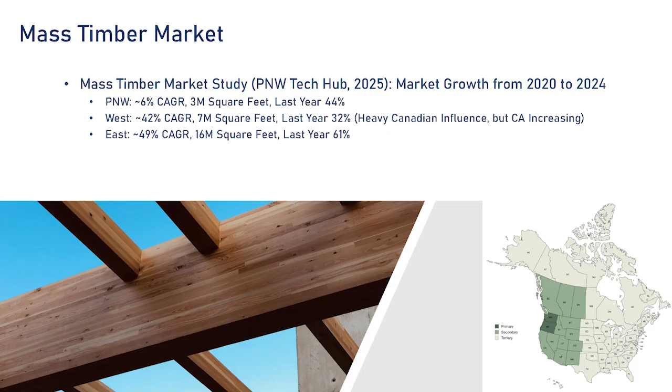So recently we were involved in a market study. We looked at market capacity and market supply. It just published a few weeks ago, but really focused on market growth over the last 5 years, and broke it down by how wood is often looked at as far as the Northwest, the West, and the East. I will say that I usually don't count Texas in the East, but they do. I think one of the key things that pops off the page is that stat of the compound annual growth rate in the East being 49% for mass timber. Last year it was 61%, but you look at the square footage of what's happening with that, and it's staggering. We really see that growth piece as part of our approach over the last decade, really looking at from forest all the way through to the frame, and how we scale and prepare ourselves for the kind of growth we anticipate in the East.

So a little bit about our story. Swinerton is a 137-year-old company, largely known as a general contractor and builder. But almost a decade ago, we completed our first mass timber building. It was a 156,000 square foot mass timber office building, then the largest in the United States. But we saw so much benefit in it. We got really excited about what the opportunities were with mass timber.

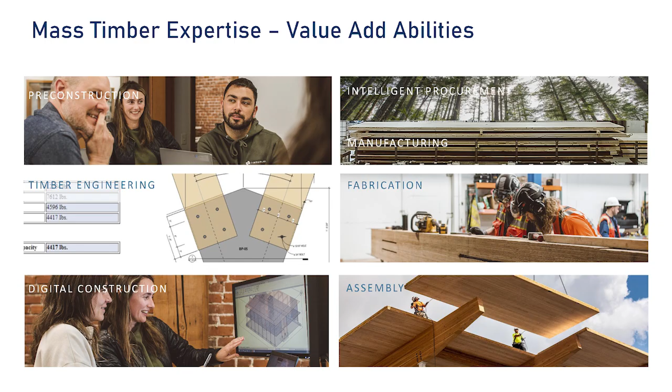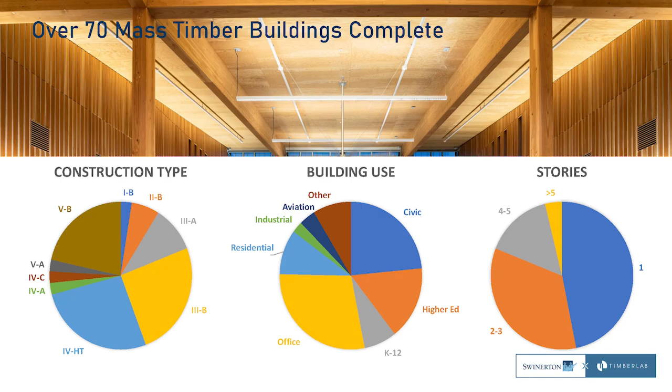I think those are amazing projects to execute on because, especially in early days, those are publicly available projects. So when you do a city hall or a community library or a higher education building or even a K-12 project, elementary schools, people are being exposed to wood. They're understanding what it is and how it changes the environment. 12 of our projects have been in education, and to me, it is phenomenal for how it changes things.

I remember talking to a nurse, and she was talking about doing a high school trip with her son to look at potential universities. They walked into a building we were involved in. She didn't know it, but she said, hey, it became the top priority for him to go to OSU Cascades in Bend because of the mass timber building and that experience of what it offered, both in program and the learning environment he would be exposed to. I was like, it's like it makes the buttons pop off your shirt for having been involved in something like that - just popping out your chest.

It was really exciting. I think the other thing that's interesting is not all buildings are tall buildings. Shorter structures are great opportunities - it doesn't have to be a high rise. High rise is an opportunity, but even the structures that are civic, we see those at lower heights.

I mentioned the markets we serve. We're a $6 billion contractor with 24 offices across the U.S., including here in Atlanta.

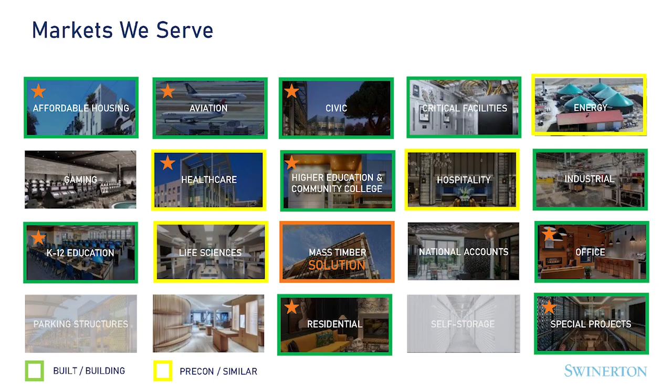It's really about how that expands into markets, and the greater the exposure we have, the more critical it is. I mentioned to Tim and Matt, if we can get like 5 mass timber buildings in a city, it creates the opportunity to take people through the spaces and experience different outcomes. It really starts to change the mindset that it's not bleeding edge, leading edge, but more mainstream as a solution in a building.

What's really cool too is that if you rewind back to the first original mass timber buildings in the U.S., office was really the market where it could thrive and be a good solution in that sector. To see today where mass timber is in virtually every single market type is cool—that resiliency, and the fact that it's a great solution no matter the market. It's maybe about finding the barriers and overcoming them and being the first.

So we're really excited about some of those emerging markets and seeing mass timber penetrate them. And then a little bit about vertical integration.

I think one amazing opportunity we have is such a robust domestic supply chain. Other folks have really hit on that today, but especially Georgia is really proud of its forests, and they are mighty good forests. Utilizing that regional supply chain creates a risk-averse solution—we've got tariffs going on right now. If we can source a lot of that superstructure from within a 200-mile radius, or even just the U.S., that's a huge value add to an owner. Who wouldn't want a risk-averse solution for their budget and schedule?

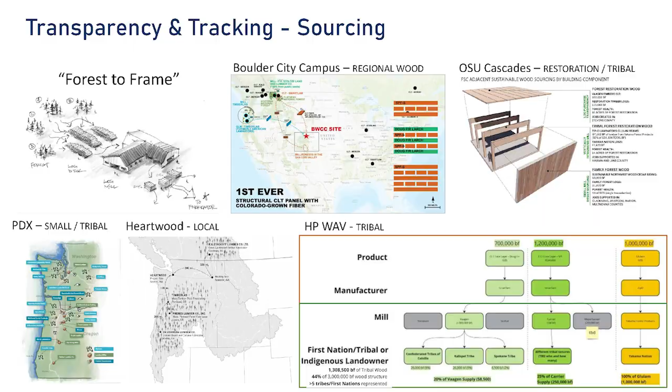These are several projects, probably 7 we've done where we've looked at sourcing all the way back to the forests. Is the solution a regional wood solution? Is it about restoration forestry? Is it about small or tribal landowners for the forests? Is it about local proximity?

A project we did for HP that's just turning over right now, 225,000 square foot facility, 44% of the wood fiber came from tribal land.

Project for Boulder City was about local sourcing and bringing local wood supply into their built product. So it's starting to be about how do we leverage our manufacturing capacity within the U.S. to continue to advance it until markets start to stand up on their own on the manufacturing side, and how we promote that overall forest economy.

We've been really diving into that track and trace mentality, especially working on Texas A&M's Appleton Center. Texas is also very proud of its wood and its forest, and they really wanted a Texas-first sourcing goal, so we're working hard to provide all Texas lumber for that project. It's a massive project.

I think more and more as we create these partnerships with local mills and manufacturers, it'll be easier to supply that regional wood if desired. I will say we take a very realistic approach to it though. Oftentimes we get asked, hey, I've got some trees on the land, can we use those? And we can build you a bench, a really nice bench out of those trees, but it's a bit more complex than just that. But really excited to see the future as regional sourcing becomes more and more of a common theme in projects.

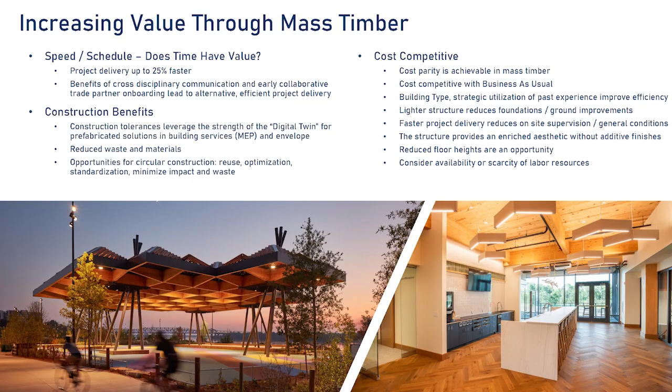100%. To me, it's exciting to have a digital twin, but it's not just that we have that for the frame. We start to have that for the building services, for the building envelope, and it's really bringing that certainty together to where an MEP subcontractor can rely on that dimensional certainty to prefabricate assemblies and kind of marry it up because the digital twin matches the built environment.

Cost competitive, Scott mentioned it earlier, cost is always there. But I think starting at the beginning, really cost parity is achievable in mass timber. Our first project was 4% cheaper and 4 months faster than structural steel. But it was recognizing all of the benefits in the approach. Some of the other things listed in those bullets really talk to whether it's reduction in site supervision because of a faster schedule, but it can also be about the bearing values of the soil. On First Tech, our first project, we found that it's great farmland, but it doesn't really hold buildings really well. So there's a lot of advantage to what that can be, and it's really kind of uncovering those together as a project team.

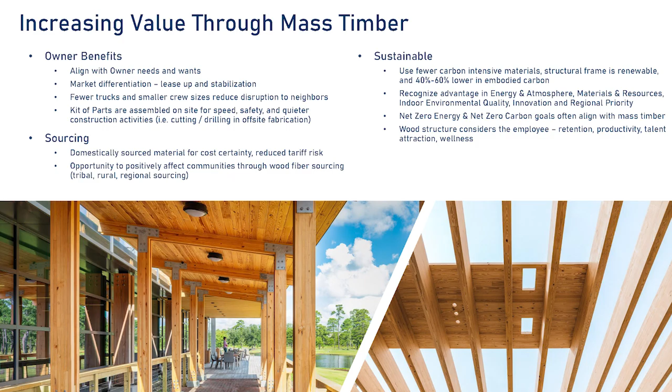And then diving into some owner benefits, which this is not an all-inclusive list, right? But we've kind of talked about the why behind why an owner would want to come and utilize mass timber in their building. And oftentimes you'll get in this visioning session and owners just start speaking about what they want out of the building, and you instantly go to mass timber. You want mass timber, and they may not have heard of that before, but it aligns quite nicely with their needs, and that's really how First Tech happened, the first project.

Market differentiation—being able to get higher lease values or rental rates, or just having a people-first mentality and high retention. For some of the built-to-suit offices we've done across the country, I'll randomly be at an airport and people will come up and say, my grandson works at that office and loves it. The proof is right there that people really do enjoy living and working in these biophilic spaces.

It's incredible. I'd also say it's the kit of parts, right—IKEA, or whatever you want to call it. I like Lincoln Logs, I was a Lincoln Logs kid, so I kind of liken it to that. But really, you're getting this kit of parts shipped to site that means smaller crews, faster, safer, and higher quality. What owner doesn't want that? So there are lots of owner benefits.

There's lots more there as well. Sourcing—already highlighted the domestic supply chain that's growing by the second, I swear—brings cost certainty and also feeds into that regional economy. That's really important to put our people to work and keep forestry afloat. I think that's a really amazing opportunity we have in the mass timber sector as it grows.

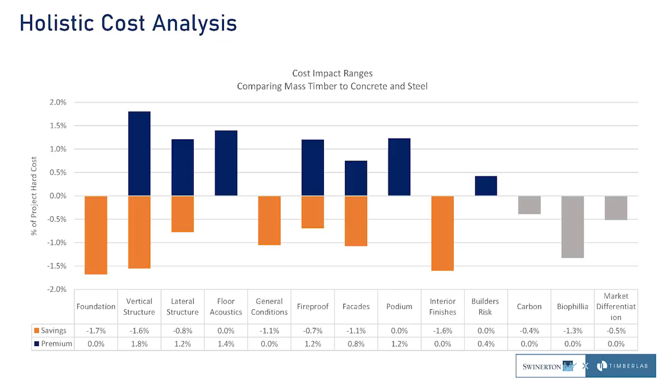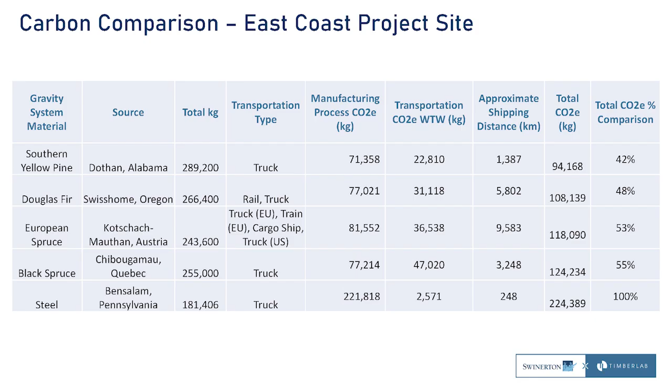So I think it's cool—mass timber is an amazing solution, and harvesting in that regional supply chain is an even further opportunity to help with your CO2e.

So we're going to do two really quick case studies. We're just going to hit highlights—I could talk about First Tech for a dozen themes and points, but we're just going to hit a couple of them. Obviously, our first project in mass timber is where we got bit by the bug, so to speak.

Just talk a little bit about that.

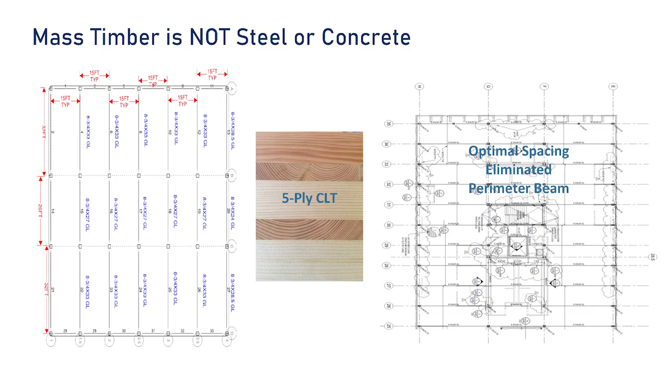At First Tech, we started with business as usual, a 30 by 30 grid, assuming a steel building, then decided, let's pursue mass timber, how can we do this differently? So we transitioned to a 15 by 32 grid and eliminated the perimeter beam. There's inherent cost savings there, but also you get the added benefit of much more daylight coming into the building, helping with that people-first approach and bringing the outside in, creating a biophilic workspace. Really cool opportunities happen when you start with timber first and set it up for its efficiencies and what timber does well.

We are in a skilled labor shortage. If you can get that kind of results using mass timber, who wouldn't want to leverage that speed to market and have that quality, safety-first mentality that comes with mass timber?

One way we were able to see those schedule savings is we looked at the structure and sequenced it. Instead of saying okay, it's a 30,000 square foot floor plate, 5 stories, why don't we look at this in thirds and build it like a tower? We found efficiency from looking at it like a tower.

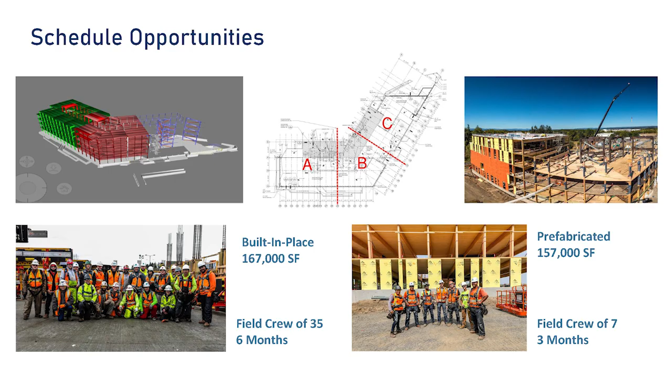I do want to highlight, and I keep echoing, I felt strong alignment with Troy - a lot of this reduction is in the field crew. But we're transferring those jobs into high-wage jobs inside a controlled environment. So it's really addressing the solution in a different way.

Heartwood is an exciting project, privately funded, not a LIHTC deal, but workforce housing. It was the first Type 4C to go through the City of Seattle, so a lot to take it through a jurisdiction that is not an easy jurisdiction. But what an amazing outcome.

Talking about some innovation, especially with the 2-hour fire rating - while we were in the middle of pre-con and design assist on this project, we got feedback that steel prices were escalating, so we took a step back and thought, where can we remove steel from? The wood-to-wood bearing connection was a really opportune place to look at how we use mass timber for what it's good at.

So we looked at doing the first mortise and tenon connection we've done on a 2-hour rated structure. Really, really cool - we did some mock-ups, figured out constructability and tolerances, as well as how to hit that 2-hour fire rated connection. It was really an amazing connection.

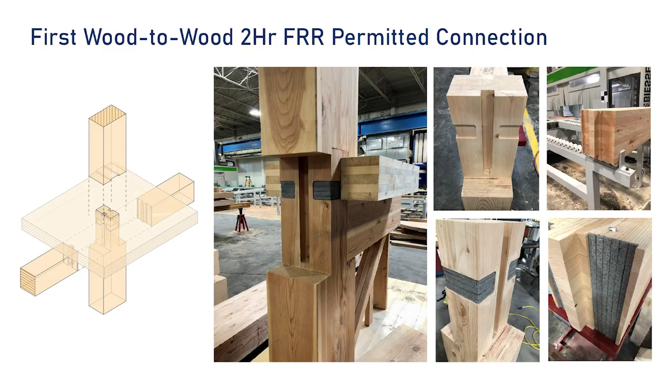Our installers loved it, not having to mess with steel. It really amounted to about $5 a square foot of cost savings at the end of the day by transitioning to this connection. Not insubstantial, and it's really fun to say we did some Japanese joinery on an 8-story structure in Seattle. It's kind of cool to bring old woodworking techniques back in as solutions for projects.

And then really for the workforce housing piece, grid optimization and really looking at our encapsulation strategy and approach to the project really led us to roughly a 15-foot bay. I think sometimes bay size is super critical in residential solutions to get to something efficient. But how does it work with the building systems and the building envelope?

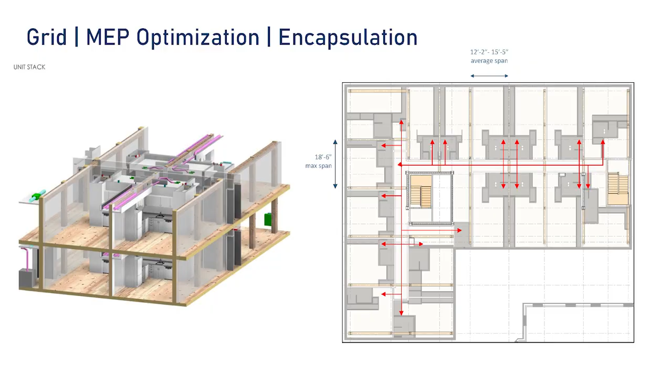When we look at site logistics and speed of construction, especially on a tight urban site, and again, the comments about Pond City Market and not having trucks stuck on the road - this site, you first approach it and you go, man, this is a great site. I've got an alley, I've got 2 roads. This is a great urban site, until you realize it's a private alley you can't use. And then there's high voltage power lines on one side, and then there's a large heritage tree on the corner that you have to preserve.

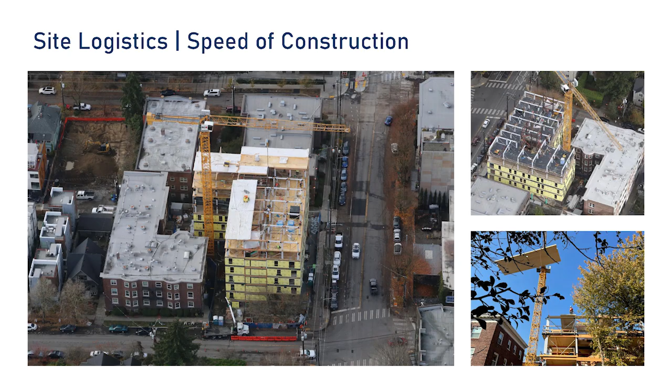So the image on the lower right gives you the idea. It's a 40-foot window that you're erecting that structure through. And parking is tight because you're on Capitol Hill in Seattle.

And so still through that, we were able to deliver the speed and put a floor of structure up every week, but also enclose as we went, so you see the dry-in happening below it, because we panelized the exterior skin. Because of that dimensional certainty, we could put a floor of skin on in a half a day and really kind of get the dry sequence to allow for follow-on trades, and that led to speed. So it's really about finding those complementary benefits in mass timber, thinking outside the box - not embracing business as usual is part of what gets us where we need to go.

So just to kind of wrap out, I think a lot of times we hear biophilic design, and a lot of people go, what's biophilic? I think I know. But I'd like to think about it in a different way. Part of what I like to do is really kind of take through how we think about questions and reflect on it.

It's like, when does a building become a process that supports the person? I think about a friend of mine who's high up at Nike, and he talked 15 years ago about - we used to think Adidas and Under Armour were our competitors that were taking our resources. But the reality is we're competing for a workforce across the whole thing. So what do we offer that's uniquely different to attract top talent?

So it's like, what are the qualities of an enriched environment? The Portland Airport, great example - it creates a different environment. And it's a common thing to hear people talk about, like people walking 15 feet, setting their bag down and taking a picture, and enjoying the smell of wood as a sensory experience.

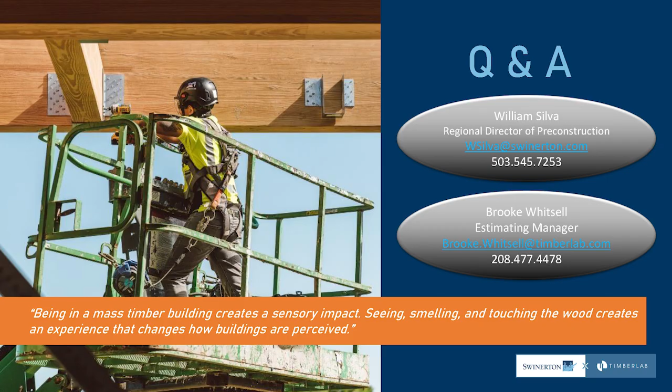So, little comment at the bottom in the orange box: being in a mass timber building creates a sensory impact. Seeing, smelling, and touching the wood creates an experience that changes how buildings are perceived. I think those would be the words I would leave you with.

We have a very short period of time. I see Matt coming with the shepherd's hook. I'll save that for Q&A - just seek us out, we're always happy to talk about it. But mass timber is an amazing opportunity.